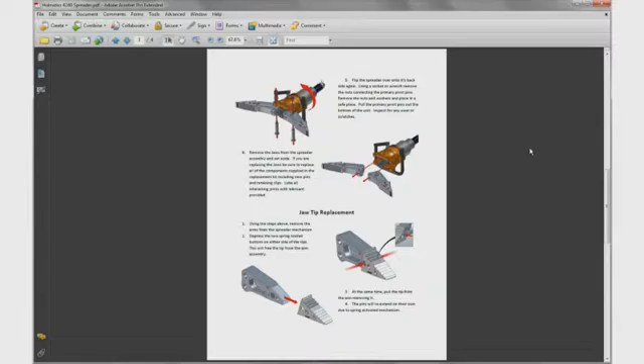This is your first look at SOLIDWORKS Composer. Whether it's a PDF instruction manual, an online interactive parts catalog, or any documentation your organization needs to create, SOLIDWORKS Composer has all the right tools to make your technical communications a reality.

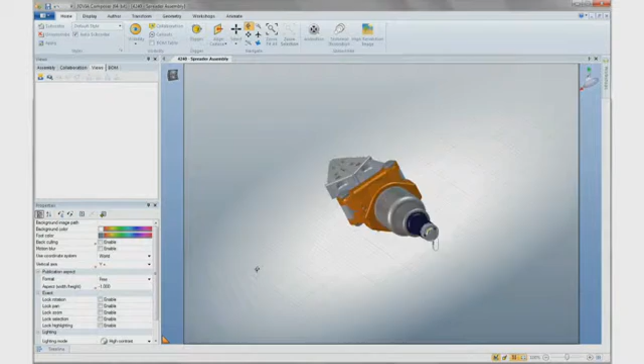Let's start by looking at creating documentation for the Holmatro spreader assembly designed in SOLIDWORKS. SOLIDWORKS Composer can work with your native 3D engineering data. Accessing the models is as easy as File Open. Time is saved because no translation is required and the intelligence of the model is preserved, including the design hierarchy.

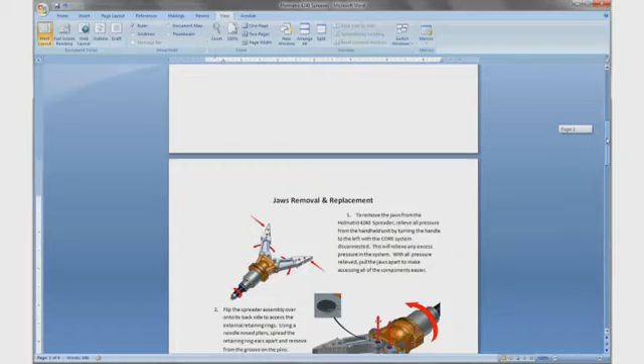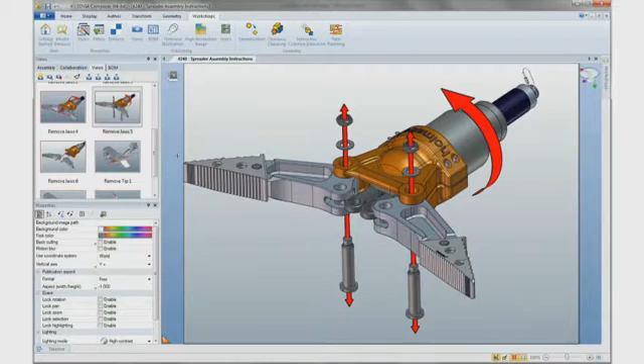We will take a look at an instruction manual already in process. This document is provided with every spreader assembly. We can see that a variety of high-resolution images created in SOLIDWORKS Composer has been implemented within this Microsoft Word document. However, if the design changes, the documentation needs to stay up to date as well. The creation of this manual was well underway before the design had been finished. We can see that none of the views contains the handle assembly that was recently added as a design change.

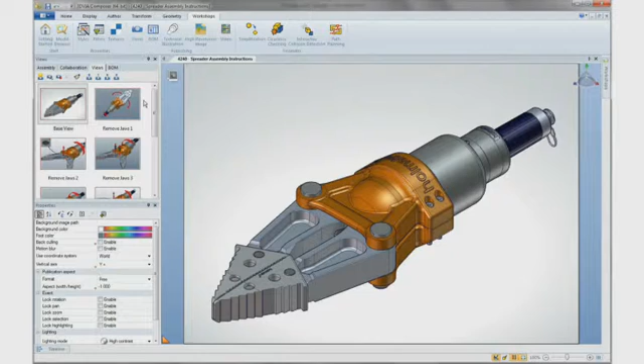Thanks to SOLIDWORKS Composer's associativity, we can see how a change within the engineering software will affect the work in progress. As the design change is made, the documentation can be made current with a simple update command. SOLIDWORKS Composer will automatically refresh all of the relevant views with the new changes, keeping documentation and engineering always on the same page.

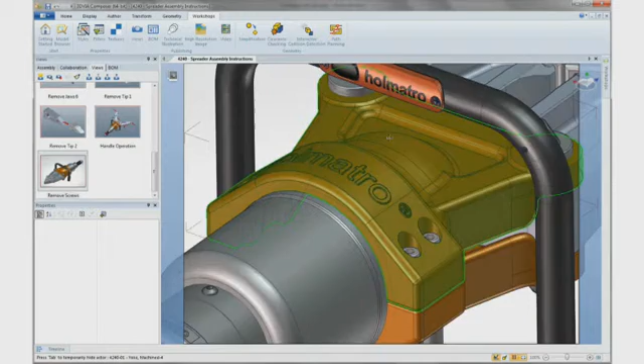Creating the images and views is simple, with an easy-to-navigate ribbon-style user interface similar to other Windows applications. We can freely create new views as desired to describe various operations and procedures. It is easy to change the orientation of a view and manipulate the geometry into alternate positions. Here we can describe removing two screws to access the battery chamber.

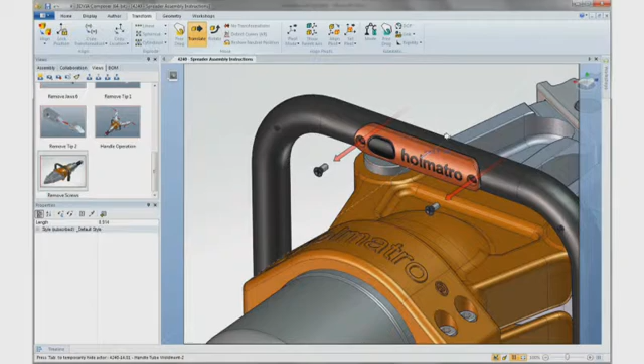To further explain the operation, you can add graphical elements, such as directional arrows. They are simple to locate and snap to geometry so placement is fast and precise. Further visual customization is possible. Arrow width, length, color, and opacity can be controlled.

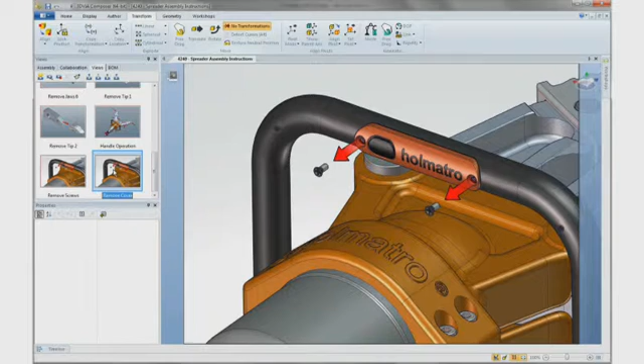Creating additional views is also easy. Here, we can describe removing the actual cover and the battery. To save time, we can use the elements of the previous view to help quickly create this new image. SOLIDWORKS Composer allows us to quickly hide any unneeded components and elements, and then utilize the same tool sets to describe the new operation.

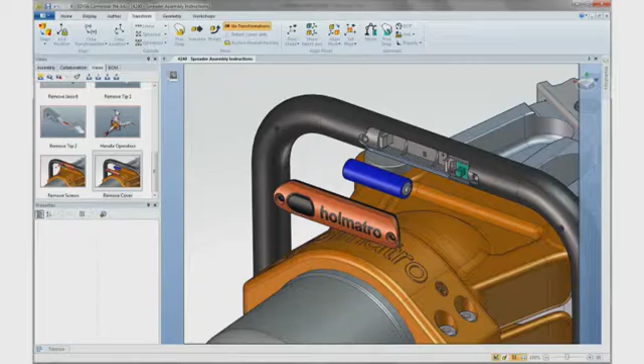Once all of the images are complete, SOLIDWORKS Composer's high-resolution image workshop can be used to quickly export all of the images created in this project. These include all the views that were updated with the new handle component, as well as our new battery replacement images.

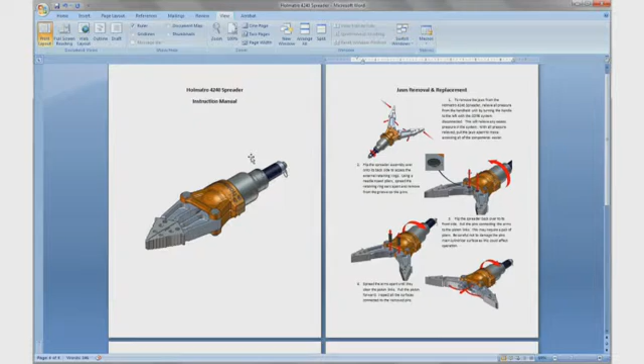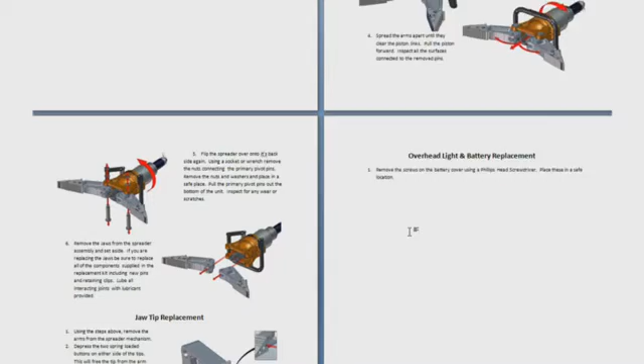Whatever tool you use for publication, it most likely has capabilities to keep all its assets up to date. In the case of Microsoft Word, you simply need to update all of the external links inside of the document to reflect the most recent engineering changes. We now can add the new image describing the removal of the battery cover and battery. Again, it's an easy process.

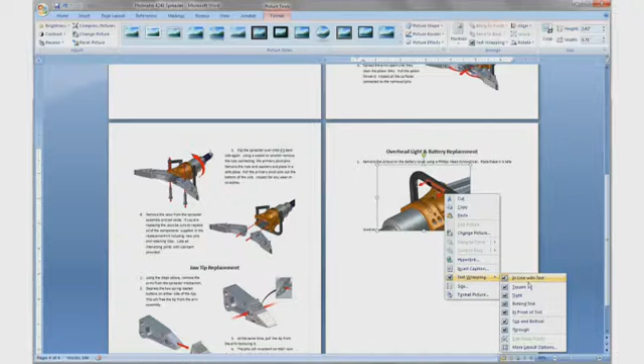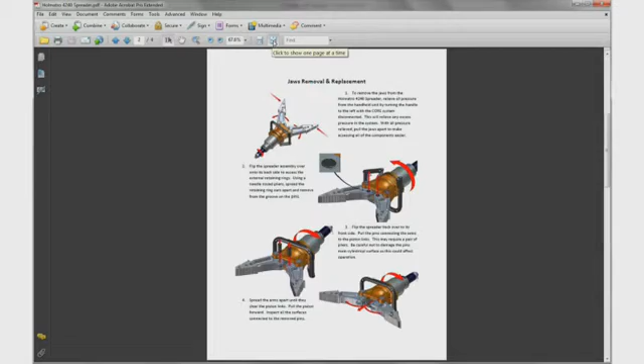Finally, we can save the entire manual as a PDF file, a nice traditional format that is common for user manuals, catalogs, and instructional booklets. It should be noted, however, that with SOLIDWORKS Composer, we can take technical communications beyond traditional formats and create compelling interactive experiences.

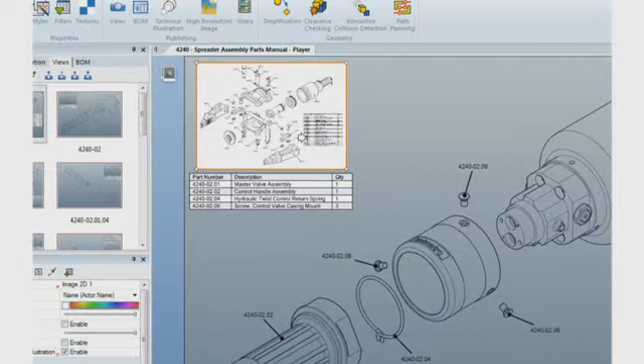In the case of an online part manual, we utilized SOLIDWORKS Composer's intelligence to include an interactive bill of materials. We can hyperlink components and create dynamic panels. For example, to return a user to the top-level assembly view, we can utilize a small image as a virtual back button. Navigation is aided by rich graphical content.

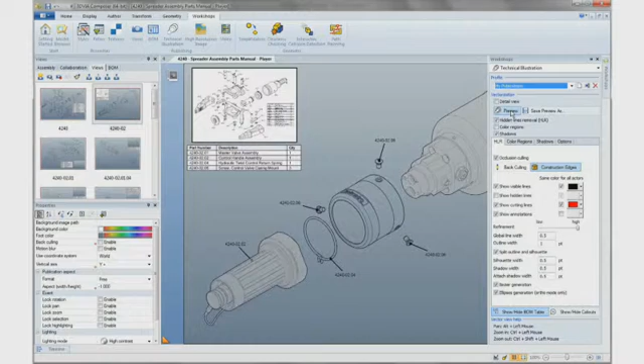SOLIDWORKS Composer can save all images in a scalable vector format, so they will preserve their clarity at any size in which they are used. Therefore, the online parts catalog can be created simultaneously with the instruction manual, and most importantly, can be created in parallel with the product development process. Any changes to the design can be automatically propagated throughout all of these compelling deliverables.

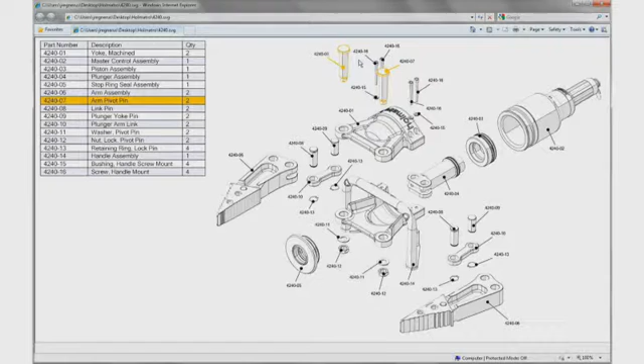If you're creating paper documentation, online experiences, or simply wish to further your organization's technical communication capabilities, SOLIDWORKS Composer is the perfect solution. This has been your first look at SOLIDWORKS Composer.